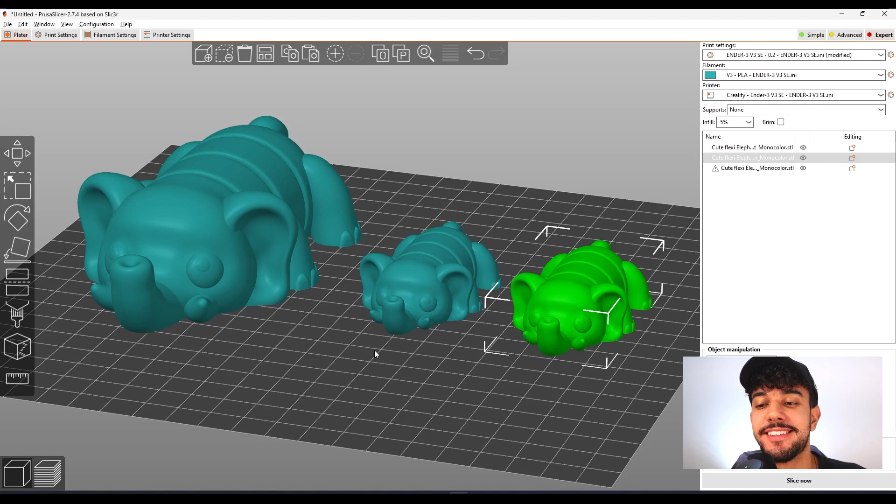In today's how to slice video, we're gonna check out some awesome flexis. So let's go to the video. So this is the elephant. As you can see, this is a really cute articulated model, and in this video, we're gonna be checking out the best print settings to print it.

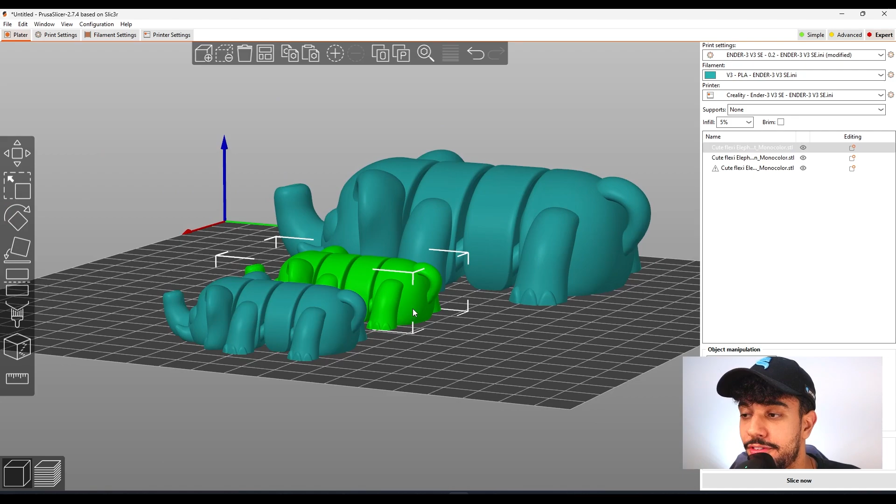So let's go. So first off, as you can see, we got three types right here. So the toy version, this is the magnet, and the keychain. As you can see, both of these are the same. The only different part is that this right here, it's got a magnet. So you can just put it in your fridge and it will look really cute. And this is a really large version. So let's go to the print settings.

So right here in layer height, we're going to be printing this model at 0.16 millimeters. This way, we're going to get a better quality print. By reducing this value, we're going to reduce the layer height. We're going to have more layers to print. It's going to take more time to print, but we're going to have a finer and better quality. So that's why I'm changing this value right now.

Going over to vertical shells, we're going to be leaving it at 3, just so we can get a really dense and rigid model. This way, if, I don't know, a kid throws this toy at the wall, it's not gonna break. So 3 is the perfect value. Going over to infill, we're gonna be selecting a 10% infill, just so we can get a really dense part with a gyroid infill pattern.

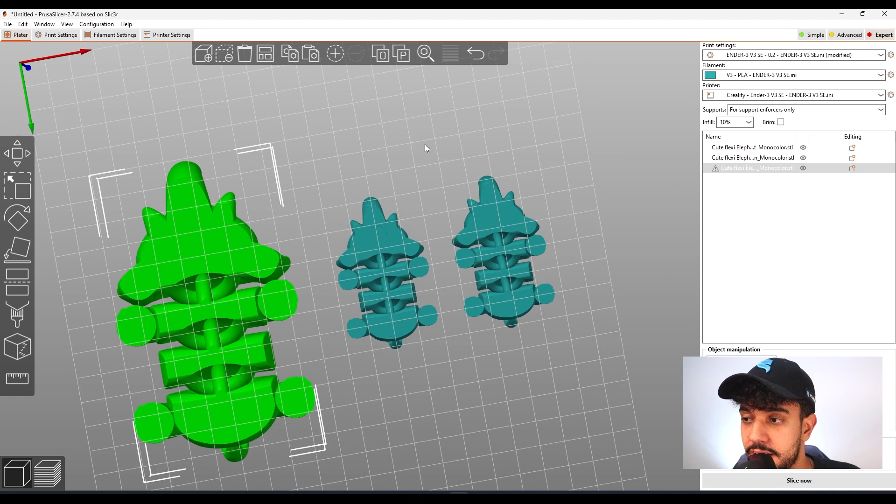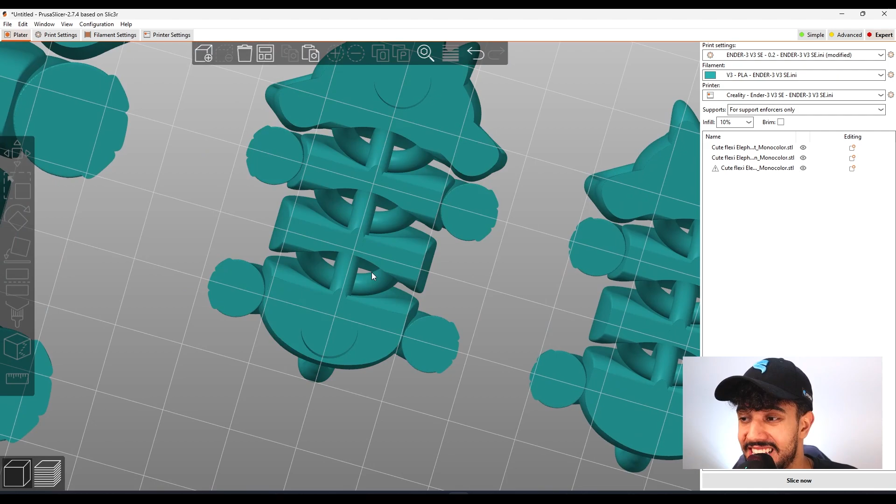Going over to skirt and brim, let me just show you something. So brim is a really nice feature to increase the surface of contact to the build plate. For articulated models, it's not well recommended to add brim because it's quite hard to remove. Sometimes right here in the connections, it's too close, and if you do not remove it properly, you can have some messed up parts, and it's not going to be articulated, it's not going to flex, and it's going to lose all of its functions. So we're not going to be adding brim.

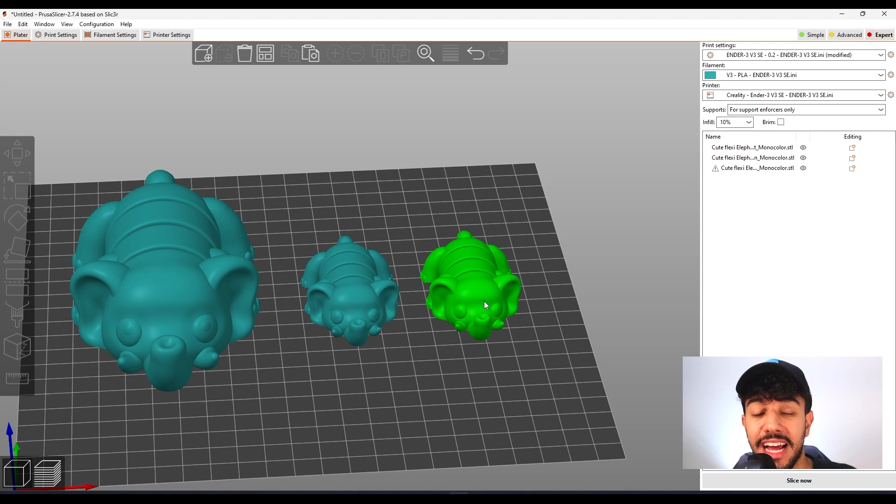But I do recommend always cleaning your build plate with some isopropyl alcohol or detergent, just to make sure that your build plate is really clean and doesn't have any dust or oils from your finger. So do not touch on top of the build plate, because oils from your finger will impact the bed adhesion. So always clean your build plate and make sure that your printer is really well leveled. So we're not going to be adding brim for this model.

Going over to support material, this model does not need any support material because it's optimized for printing. Going over to speed, we can be printing at your standard print speed. If your printer is not too stable, you can be reducing the small perimeters right here. I'm just going to suppose 50 millimeters a second on not stable printers and low end printers. For Bambu Lab printers, we can print at the standard print speed. We do not need to worry.

Just make sure that the first layer is at a really low value, because the first layer is the most important layer. All of the other layers are going to go on top of this one. So make sure you got a good first layer. I'm just going to be selecting 50 millimeters so you can see what's going to change after we slice. So let's just slice to take a look.

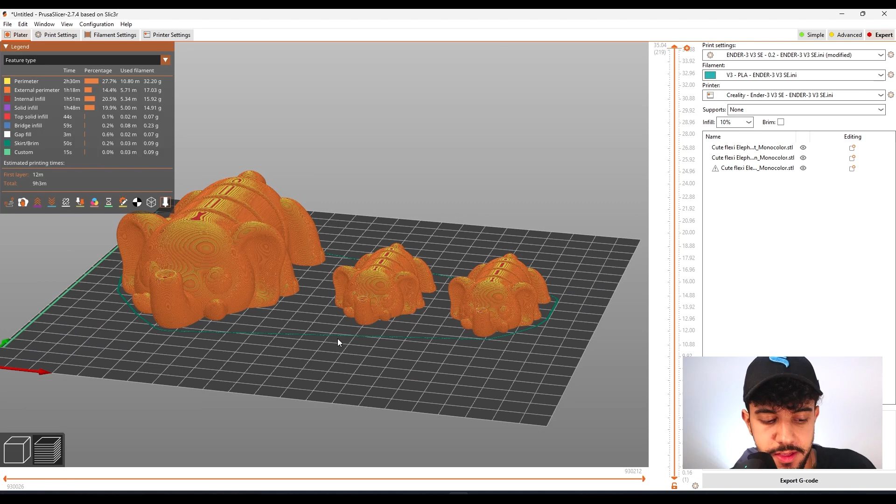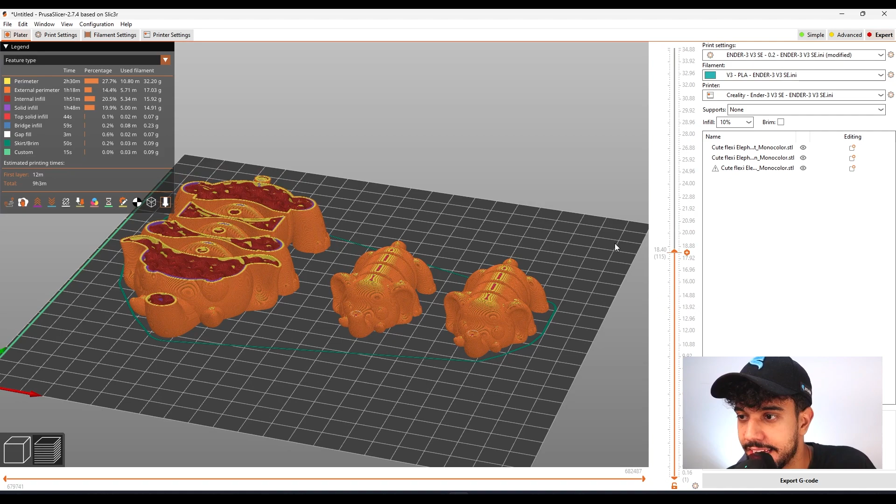So as you can see, we have sliced, and it's going to take 9 hours and 3 minutes to print each of the models. So the toy, the magnet for the fridge, and the keychain. So this looks quite nice. If we go down the layers, you'll see that it's being printed perfectly. So we got the first layer, then it connects to have the effect of the articulated model, and this looks perfect.

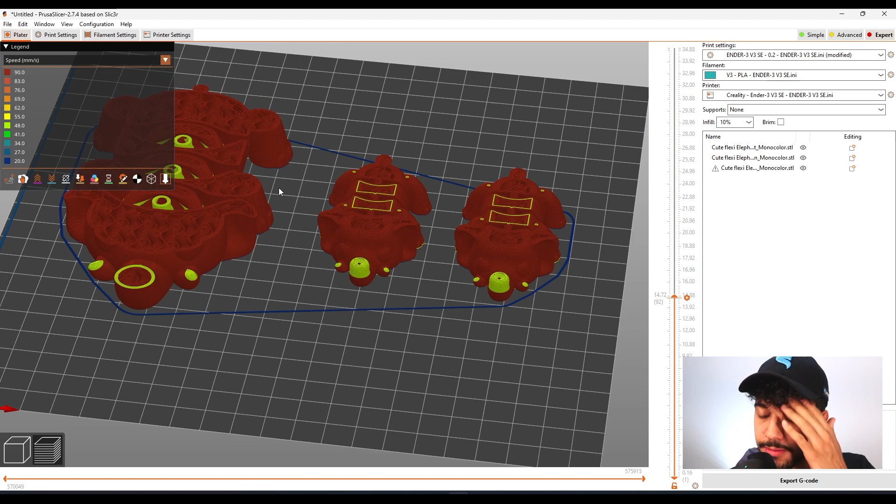If we go over to speed, I can show you, not fan speed, go to speed, you'll see that it reduces the speed on small perimeters. So this is quite nice. Sometimes right here in these connections, it's well recommended that it's not too fast. So this is why I have changed the value, but feel free to change it to the value you may like.

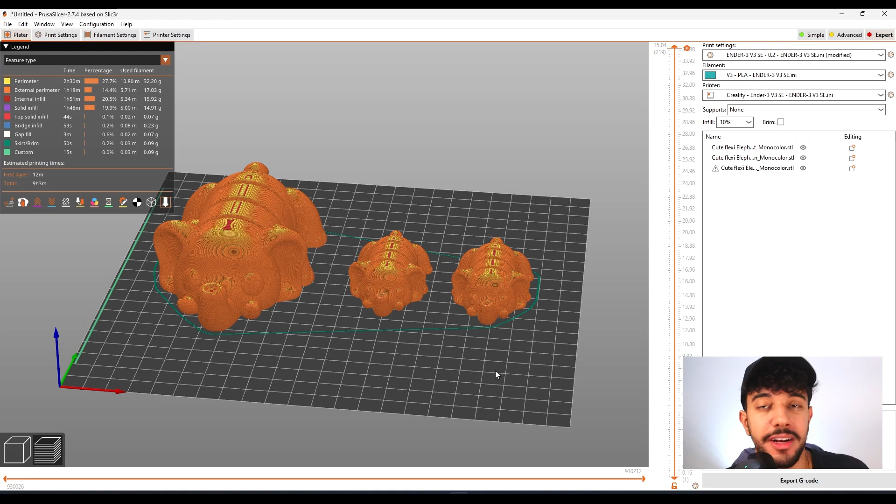If you're going to print this model in multicolor, I do recommend printing more models on the same build plate. This way, you're gonna save some filament, because if you print just one of these elephant keychains, you're gonna be wasting the same amount of filament as if you print 20. So it's better to load up your build plates and print lots of them. So this is quite nice. So grab a really nice filament that you have laying around and print this model. So the models are ready to print.